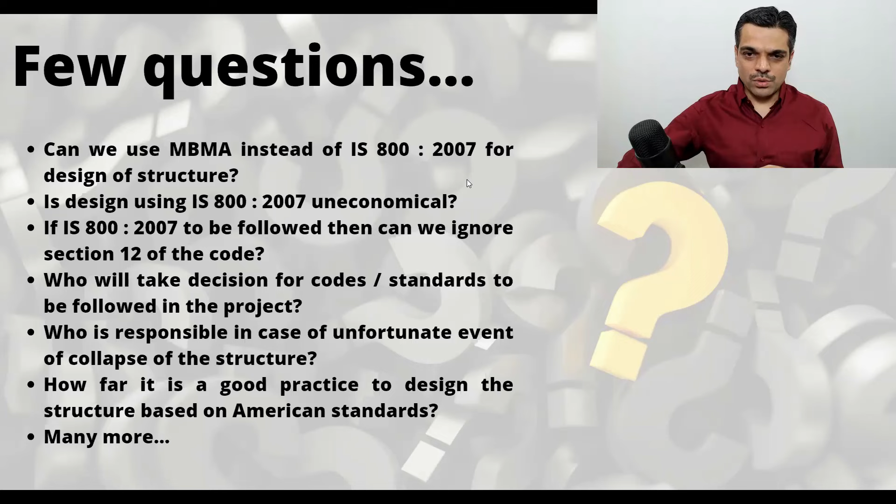So first of all, what is MBMA? If I talk about myself, I came to this terminology around 2013 or so. Before that, I heard this term, but I did not know what MBMA is. So first, let us try to understand what MBMA is. As we all know, MBMA is the full form of Metal Building Manufacturers Association, founded in 1956, and it promotes the design and construction of metal building systems in the low-rise non-residential building marketplace.

These I have taken from the preface of the MBMA document. What it says is that use of this manual is totally voluntary. Each building manufacturer or designer retains the prerogative to choose its own design and commercial practices, and the responsibility to design its building system to comply with applicable specifications and safety considerations. So it's voluntary to follow this document. It's not compulsory. That's what it's trying to say in the preface.

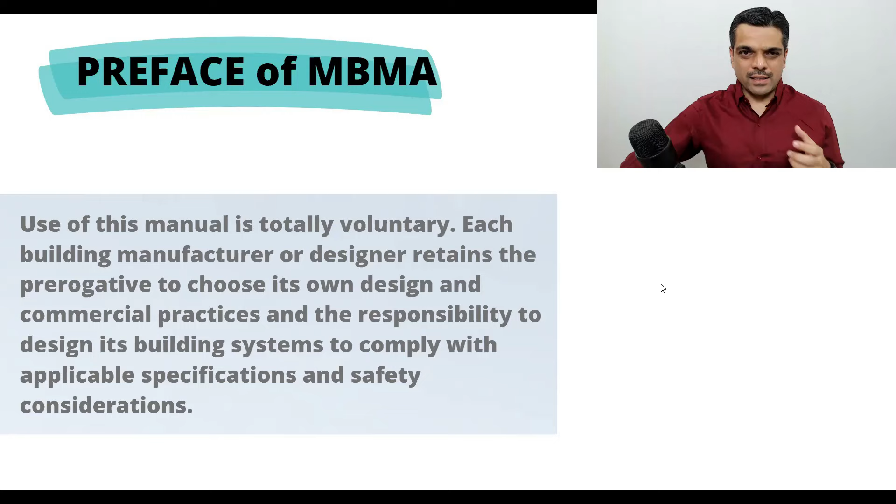Now, in the preface itself, this is the disclaimer mentioned in the document, that MBMA expressly disclaims all liability for damages of any sort, whether direct, indirect, or consequential, arising out of the use of, reference to, or reliance on this manual or any of its content. So it doesn't take liability for any consequence, or let's say any damage arising because of the use of this manual. So this is the disclaimer put up in the preface of the document.

Now, when we talk about MBMA, this is one more question we received: which is the latest document? So the latest document, according to me, is the 2018 MBMA manual. In this, the MBMA manual is revised substantially. There are major revisions made. Earlier documents were in 2006 and 2012. So all those MBMA documents are now superseded. The latest document is MBMA 2018.

And one more major update is that in 2019, MBMA has issued seismic guidelines. So it is talking about earthquake resistant design and detailing of steel structures. Okay.

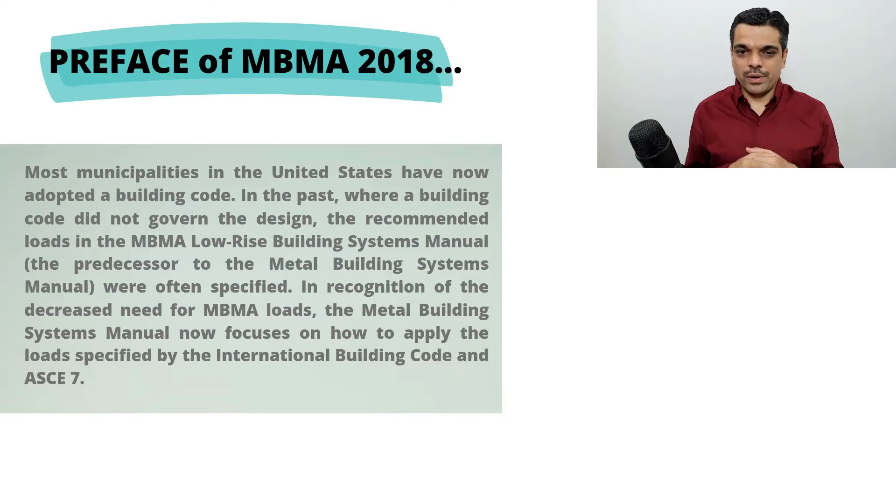And one more thing regarding the MBMA 2018 edition. The 2018 edition of the MBMA metal building systems manual now brings the manual into conformance with the 2018 edition of the International Building Code and ASCE 7-16. Okay, so that's what we just discussed in the preface also.

Now this is interesting. What is the 2019 document? So in 2019, seismic design guidelines were published for metal building systems. And what it says, again, in the preface of the document: the design recommendations in this guide are based on the IBC 2015, American Society of Civil Engineers, Structural Engineering Institute, ASCE/SEI 7-10, and standard industry practice.

Notes are also provided to point out differences in the 2018 IBC, ASCE 7-16, and AISC 360-16. An appendix also includes resource information on new research and recommendations. And this publication now focuses on LRFD. And it is also pointing out the differences or advantages of the ASD method.

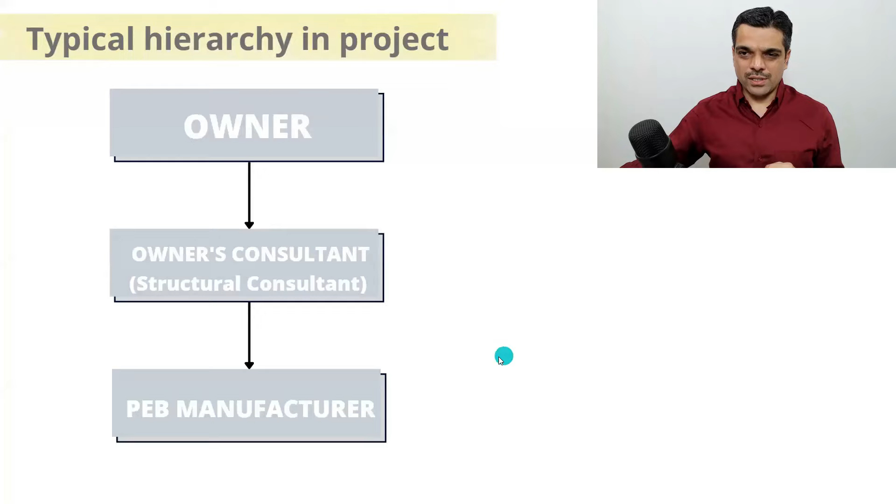So now, whenever we talk about the design of industrial, or let's say PEB, structures in India, this is the typical hierarchy. One is the owner, then there is the owner's consultant, and there is the PEB manufacturer. Typically the owner will appoint the owner's consultant, which is a structural consultant, and the structural consultant will prepare the tender specifications. After preparation of the tender specification, the PEB manufacturer will be shortlisted based on techno-commercial evaluation. This is the general or typical cycle in projects, right?

Now we have talked a little bit about MBMA. Now let's also talk about IS 800 2007. As we know, IS 800 2007 applies to general construction using hot rolled steel sections, joined using riveting, bolting and welding. For specific provisions for bridges, chimneys, cranes, tanks, transmission line towers, etc., we need to refer to separate codes. Okay.

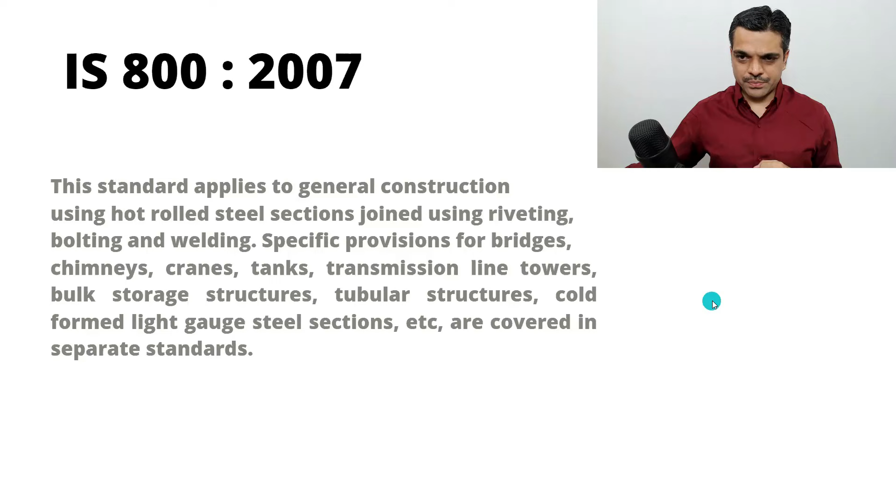So as we discussed about MBMA, which is the latest document, for IS 800 2007 also, first let's try to understand which is the latest document.

As many of you may be aware, for IS 800 2007, one amendment was issued in 2012. That's the only amendment. Thereafter in 2016, improvements were made in NBC. In NBC 2016, the entire IS 800 2007 was reproduced along with amendment number 1, as well as improvements made in NBC 2016. So NBC 2016 is the latest document for design of steel structures in India as of today.

So whenever we are preparing a tender, maybe for PEB or for other steel structure design, we must specify NBC 2016, because IS 800 2007 is not yet updated with respect to the improvements made in NBC 2016. And there are many improvements made in NBC 2016. So I would recommend that you please go through it if you have not yet, and if you have any further questions, we can discuss it in detail.

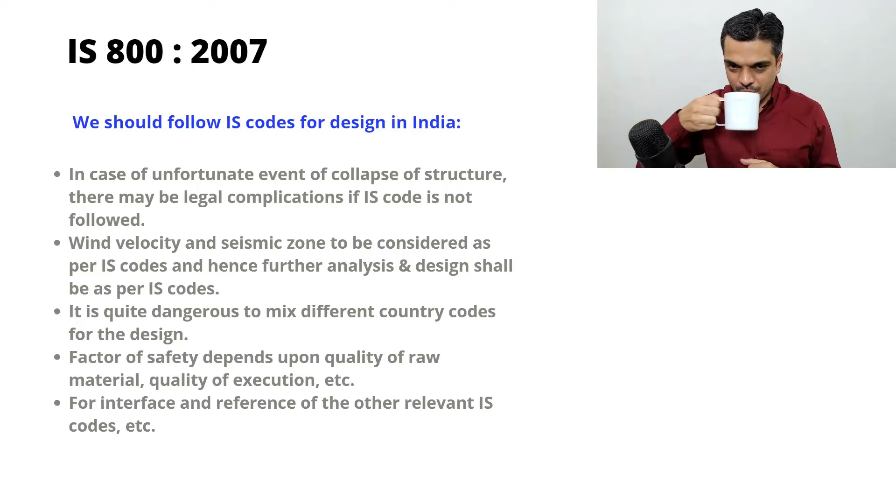Now, the important question: why we should follow Indian standard codes for design in India. Here I have put up my thoughts on that. Firstly, in case of any unfortunate event of collapse of a structure, there may be legal complications if the IS code is not followed, in my opinion. Secondly, the most important part is the wind velocity and the seismic zone. Those are specified in IS 875 Part 3 and IS 1893 Part 1.

Whenever we take wind velocity and seismic zone from the Indian standard, we cannot mix it up with another country's code, because in any one country's code there are a lot of calibrations and engineering judgments being made. So according to me, if we design one structure with one country code in a holistic way, and then design a similar structure with a different country code considering all its clauses, there may not be much difference.

But if we mix up both codes, there is a possibility of a very highly conservative or unconservative error, because calibration happens throughout the entire process. The overall philosophy could be different. That's why once we take wind velocity and seismic zone as per the Indian standard codes, load combinations, analysis and design procedure shall be followed as per the Indian standard code only. It's quite dangerous to mix different country codes for design.

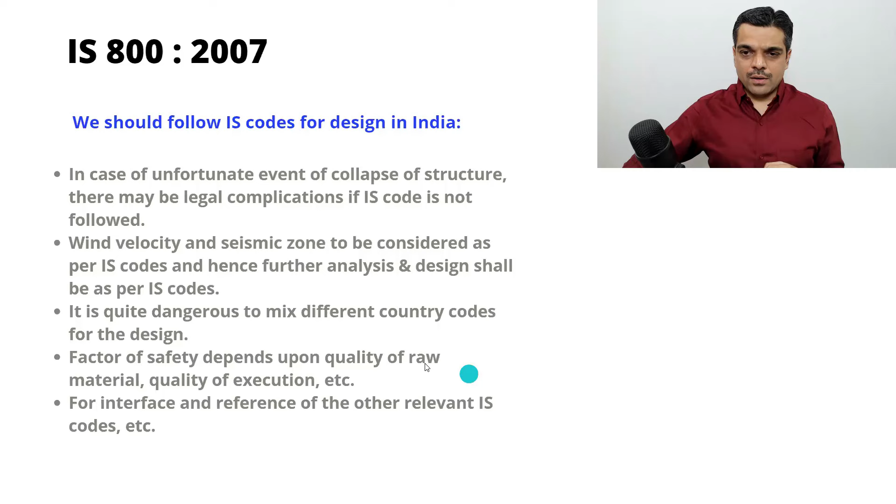One more point: the factor of safety depends upon quality of raw material, quality of execution, etc. So in our country's code, the factor of safety may be a little bit higher with respect to developed countries' codes, where practices are relatively better in terms of quality control or quality of execution.

One more part relates to the interface and references to other relevant Indian standard codes. Once we take data from the Indian standard code, there are references given to other relevant Indian standard codes. So if you follow only one set of documents, it is better for the design. Otherwise, there is a possibility of major error, according to me. So these are a few reasons why we should consider IS 800 2007.

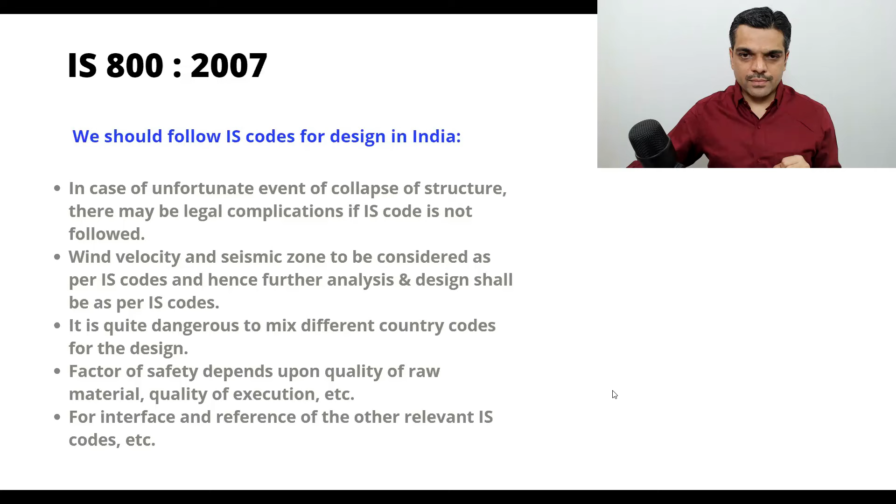Now, when we talk about IS 800 2007, this question comes up: design considering IS 800 2007 is uneconomical. Let me quickly share my experience. As I remember, it was in 2008 when we first designed an entire structure using IS 800 2007, and we were claiming it was the first project designed considering all the clauses of the code using the limit state design method approach.

But while working on other projects, gradually we realized there were a few clauses and parameters we didn't understand properly the first time. In 2011 I was involved in a very big structure, a main powerhouse, with tonnage in the range of 5,000 metric tons. We carried out an in-house exercise, because there were always arguments that with IS 800 2007, our design was becoming heavy compared to the IS 800 1984 code.

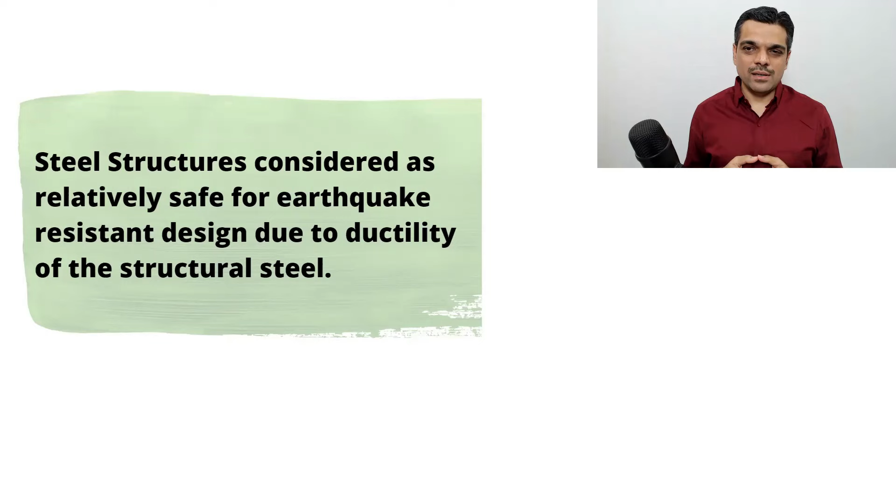So generally whenever we talk about steel structures, steel structures are considered relatively safe for earthquake resistant design, right? Because of the ductility of the steel structure. Whenever we say it is relatively safe, we are comparing it with reinforced concrete design, RCC structures, because it is more ductile. But this thought process was challenged during the Northridge earthquake of 1994. So what happened in that earthquake?

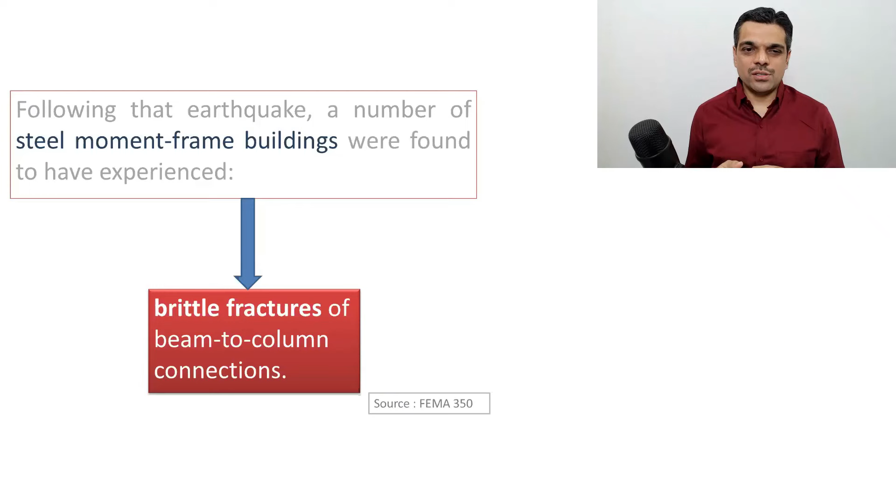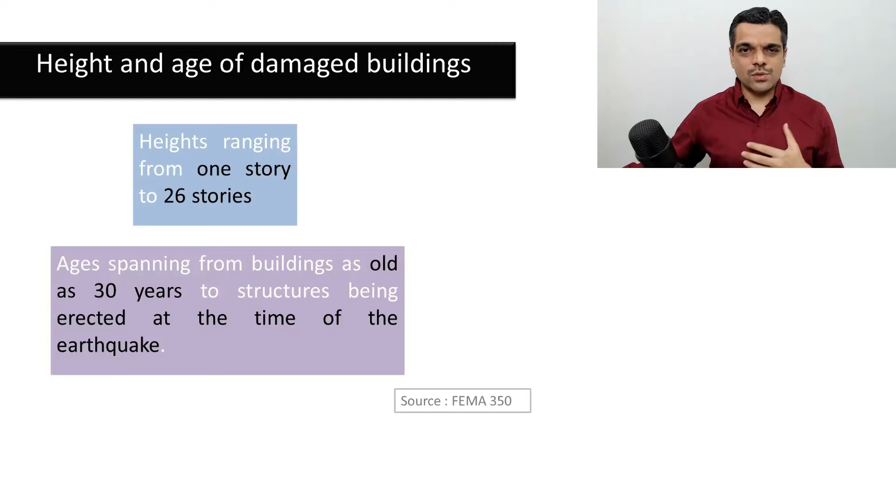Following that earthquake, a number of steel moment frame buildings were found to have experienced brittle fractures of beam to column connections. And the buildings which were damaged, if we quickly take statistics of those buildings, heights were ranging from 1 story to 26 stories, and the age of the buildings spanned from as old as 30 years to structures which were being erected just at the time of the earthquake. So all structures were diversified with respect to the story height as well as the age of the structure.

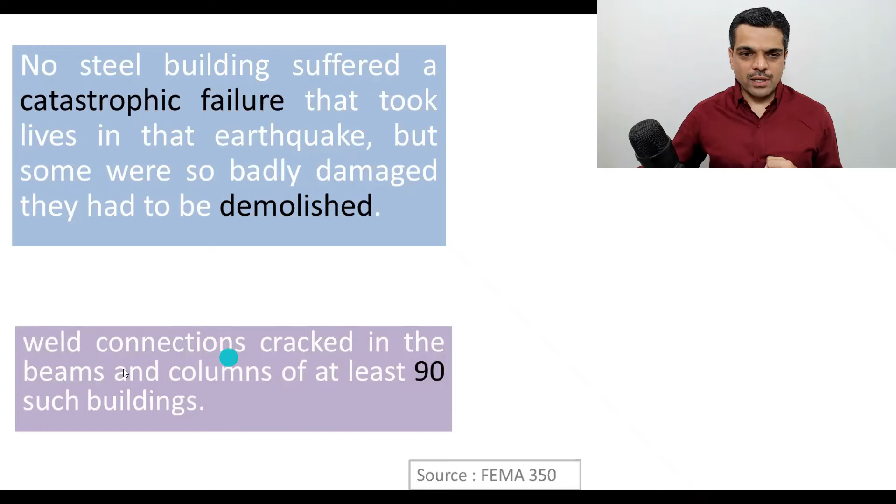So one of the good things was that no steel building suffered a catastrophic failure that took lives in that earthquake, but some were so badly damaged that they had to be completely demolished. Now, what was the type of damage? The weld connections cracked in the beams and columns of at least 90 such buildings.

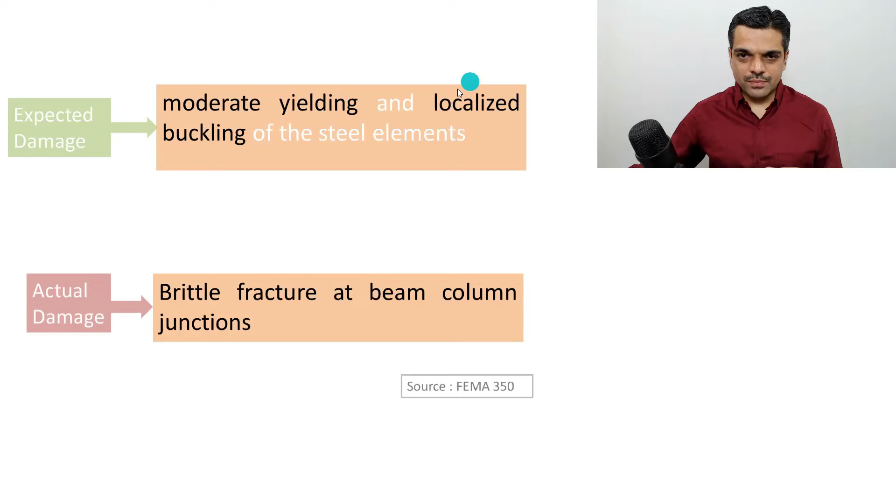So whenever we are designing the steel structure with respect to earthquake resistant design, our expected damage is always moderate yielding and localized buckling of the steel elements. But in reality, what happened during that earthquake was a brittle fracture at beam column junctions. So what went wrong with respect to the beam column junctions and the beam welding details? Right now I have just shown the typical welded moment connection which was used prior to the 1994 earthquake.

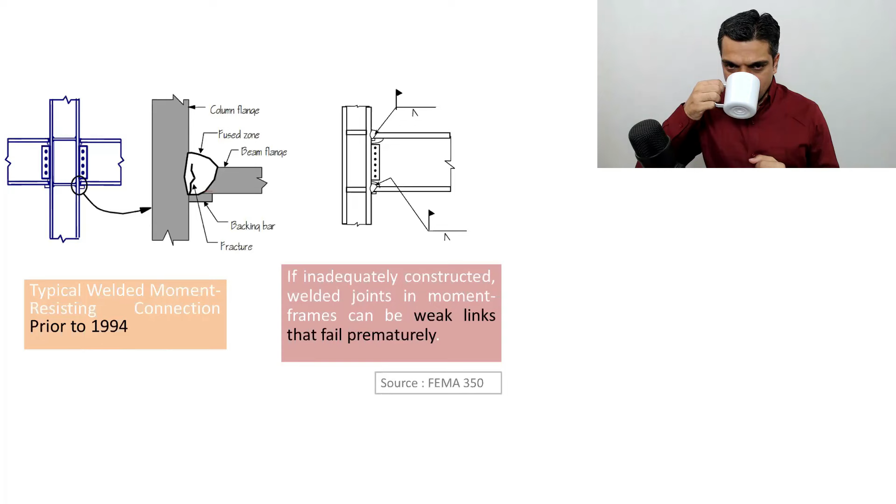So what happened? This detail was probably standardized around the 1950s or 60s. And gradually, as time was passing, let's say the 1950s, 60s, 70s, the quality of raw material was getting improved. So with that, the yield strength we were getting for the main sections was increasing beyond the specified one.

So with this, in the buildings, the main column and beam sections, say the flange which I am highlighting here, had increased strength with respect to the welding, because in the standard details which were specified, the electrode strength etc. were not updated for this increased strength, and this increased strength was beyond the specified nominal value. So with that, the welding became the weak link in the structure. This was one of the reasons.

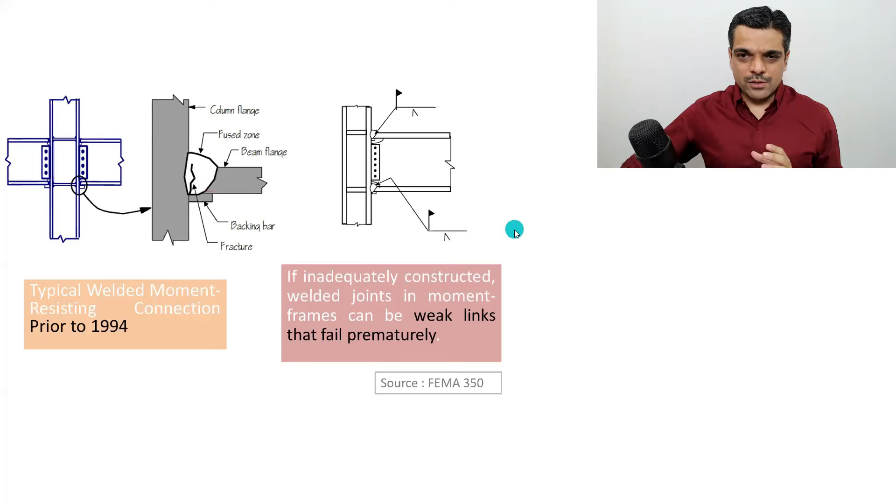And again, if the welding is inadequately or improperly executed, then also it could become the weak link in the entire structure during the event of the earthquake. So what happened after that? The concept of pre-qualified connections came. Thereafter, around 120 or 150 connections were tested at full scale to derive connection details which can be used readily by practicing engineers, and that is popularly known as pre-qualified connections.

Unfortunately, we do not have these pre-qualified connection details in India. So whenever we talk about section 12 in IS 800 2007, according to me, there are still a lot of improvements required. And one of the major things is connection detailing, because when we refer to section 12 of IS 800 2007, for any frame, let's say OMF, SMRF, whatever frame, the first clause is that the structure should be able to withstand a joint rotation of 0.02 radians or 0.04 radians depending upon the type of frame.

And it shall be shown that the structure is safe for the nonlinear displacement arising due to that joint rotation. Now in the analytical model, of course, we can establish that joint rotation, but in these pre-qualified connections, those joint rotations were actually tested. So according to me, this is one of the big improvement areas. And let's hope that we get some more details related to connection details.

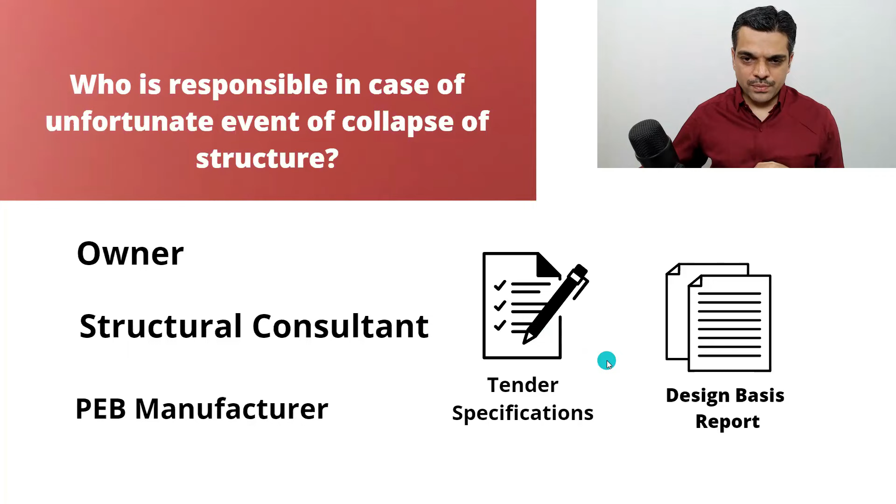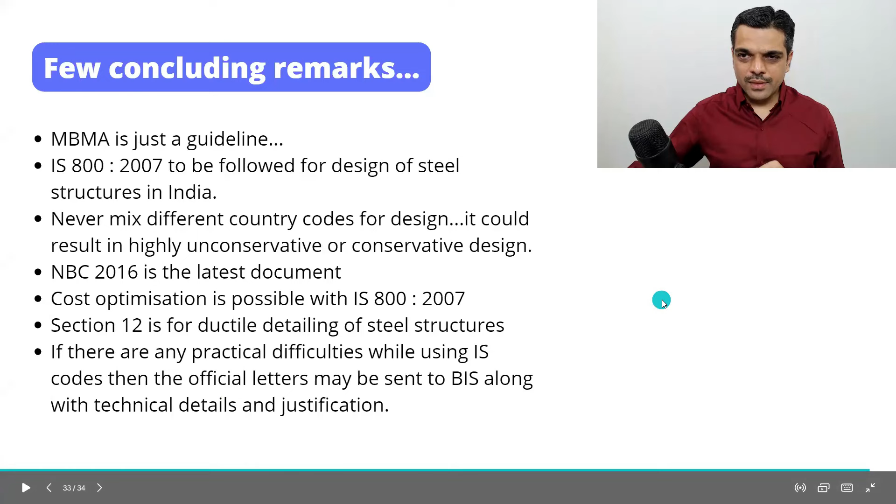Okay, so this is what I wanted to share with you. I just attempted to share my quick thoughts on this subject, and now let us have an open discussion on this important subject.